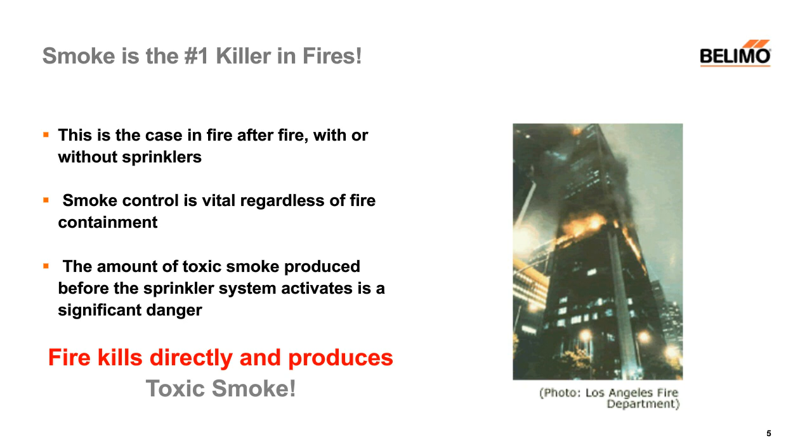Dampers are installed per two chapters primarily in the International Building Code. Chapter 7 deals with structure, and compartmentation needs to be maintained in fire walls, barriers, and partitions, and smoke barriers and partitions. So the whole idea is if a fire starts in a zone, we get dampers closed in the barrier walls so that we can contain both the fire and the smoke.

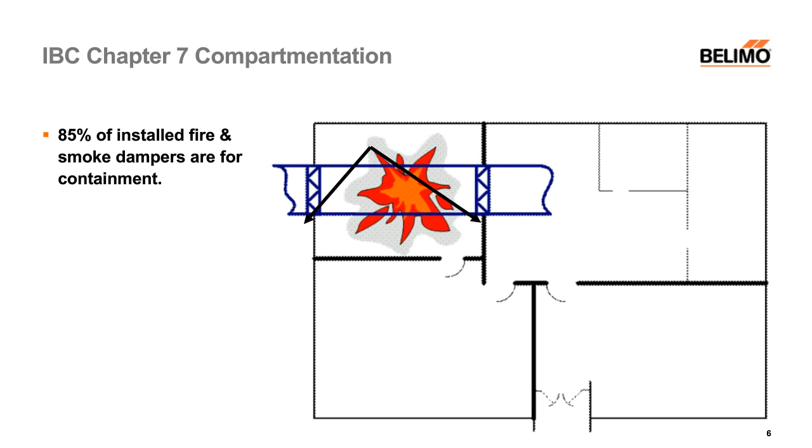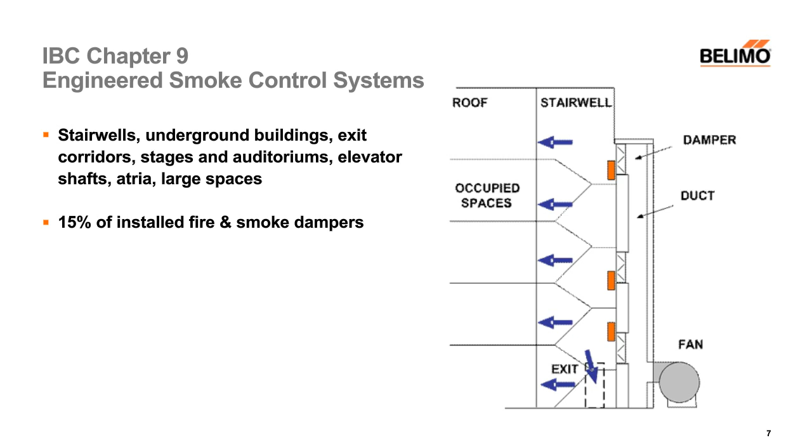About 15% of dampers installed are for an engineered smoke control system. The reason why it's important to distinguish between them is because the testing requirements are different for the two types of systems.

Dampers are installed as part of a system, not just in themselves to protect the walls. Here are some of the aspects of the building which the dampers might be coordinated with. So it can get fairly complicated on the smoke control systems, as opposed to the Chapter 7 applications, which are simple. I'll let you read it rather than my lecturing.

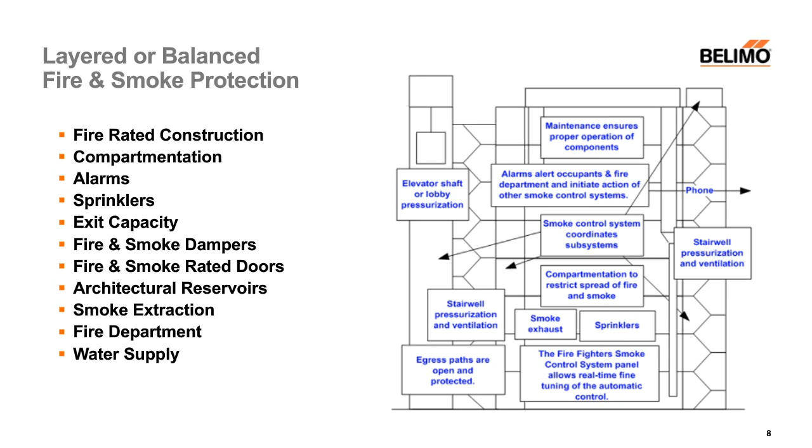So dampers are part of a big system, and we could see things happen in buildings such as bioterrorism, gas or other toxic chemical leaks, and any accidental or intentional fire, of course. We want to control smoke migration far from the origin of the fire. So we've got sensitive property, records, telecommunications equipment, possible water supply shortages, and the dampers are going to be backup or part of a whole system. We speak of it as balanced or layered fire smoke protection.

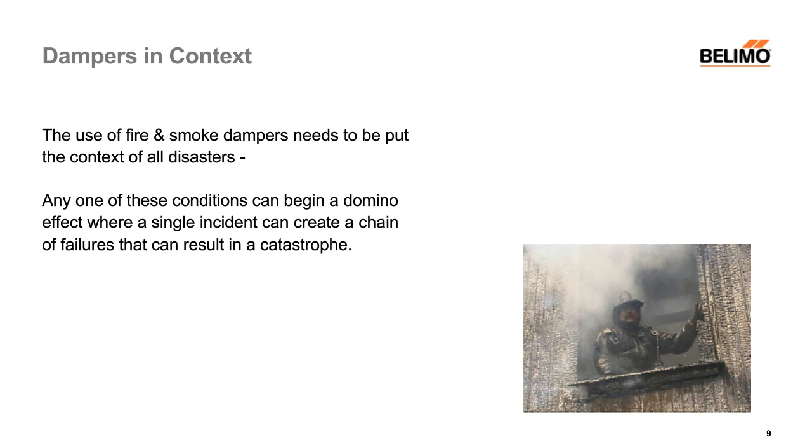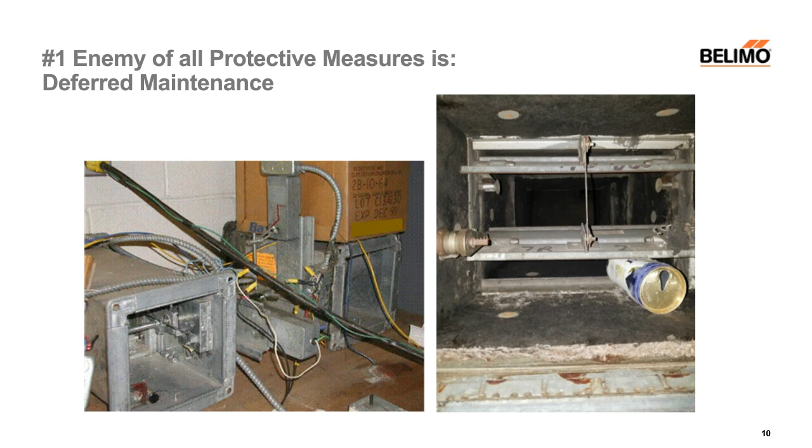The types of dampers: there are ceiling radiation dampers.

So just about every diffuser in any drop ceiling or ducted ceiling is going to have a heat radiation damper above it, and we're going to keep heat from going up into the plenums and causing a problem if a fire is in the space.

They're non-actuated, they're a fusible link, and there is no periodic testing required of these. They're pretty reliable. They're considered perfectly reliable as long as they're installed properly.

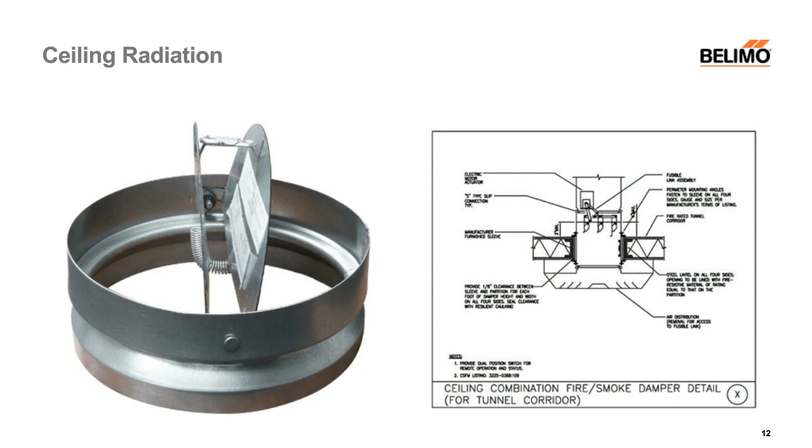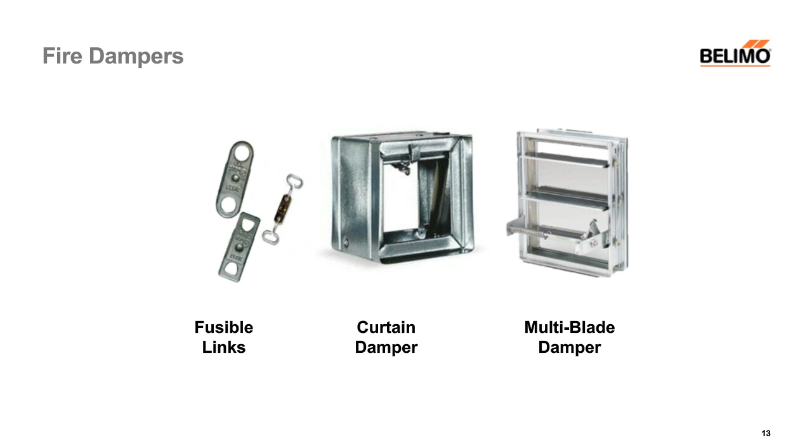Smoke dampers. These are always actuated. We have a mechanical way of measuring temperature, the fusible link, but we have only electronics for measuring smoke. So we're going to have a smoke detector, which might be part of an area smoke detection system or a local smoke detector. And we're going to have a smoke damper that will be actuated, and it will spring that damper closed.

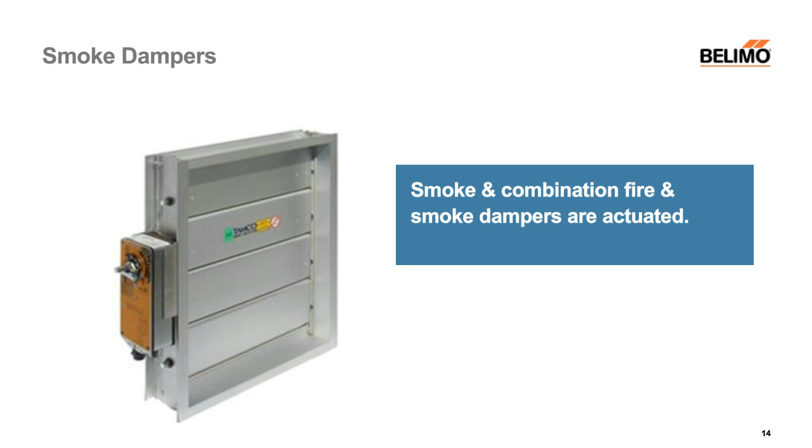And then there's the combination fire and smoke damper. So we're going to have a temperature sensor. At the bottom below the actuator is a thermodisc, which is manual reset. At 165 F, it will cut power to the actuator and spring it closed. And then there will be a smoke detector or a relay wired in series with the power going to that bimetal, and that will be what causes the smoke function to close the damper.

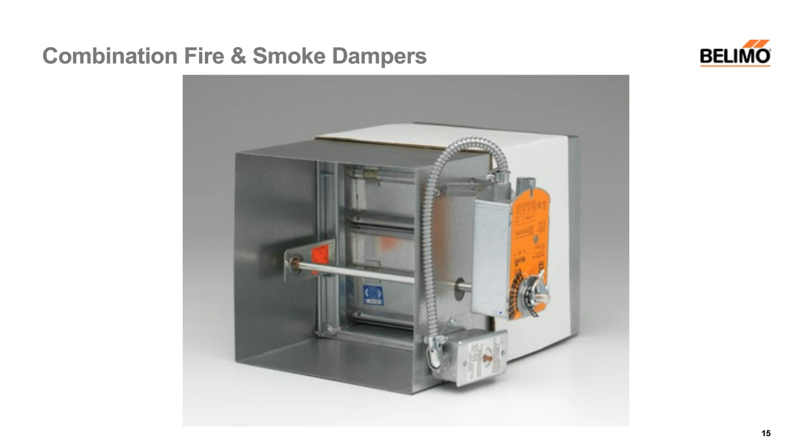If you don't have high temperature, power goes to the actuator, it drives open, and it'll sit open for years at a time until tested.

The damper itself is not connected to the fire alarm system, but codes do call for, if you've got a smoke detector in the building and there's an alarm system, then it's the smoke detector that will close the contact and alarm that there's probably a fire in the building. Smoke will be sensed long before the temperature rise.

Now that's a Chapter 7 application. The Chapter 9 application is going to be a lot more complicated. You could have a reopenable damper. They're not required. You're going to have position indication at the damper, and the firefighter smoke control panel will be able to override the damper, open or closed, or leave it in the automatic mode.

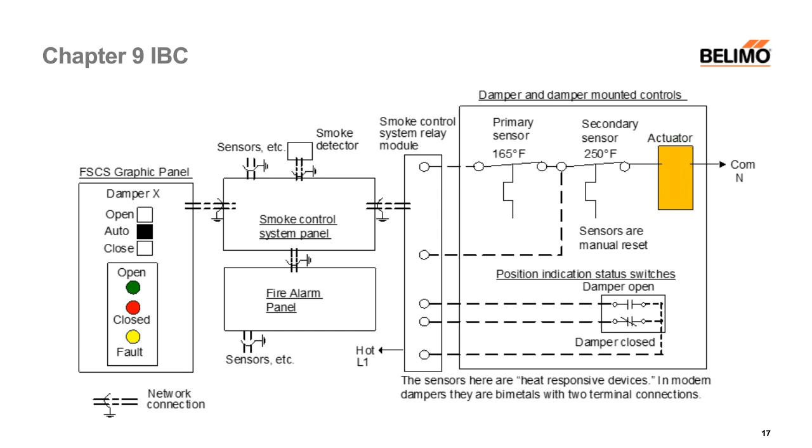New construction, the International Building Code and the International Fire Code are the model codes for everywhere in the United States. And they specify that the fire dampers will be UL 555, smoke dampers 555S, and those ceiling radiation dampers 555C. This is the new construction, and those dampers have to have been tested to these standards.

They're factory standards, so you will test the dampers, and the damper manufacturers will provide installation methods for the different construction, as well as regulating the factory construction and what actuators are allowed.

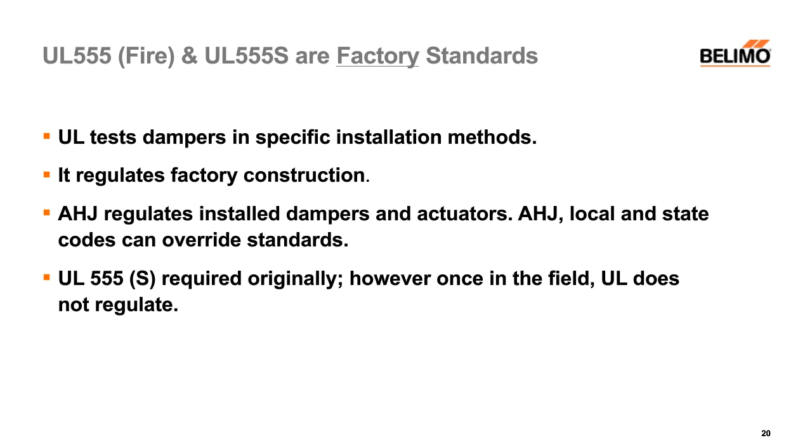Once installed, periodic inspection and repair is mandated by the two codes to use the NFPA standards, standards 80 and 105. Those are the governing standards for periodic inspection and repair. UL 555 is not involved in the field repair once those dampers have been installed.

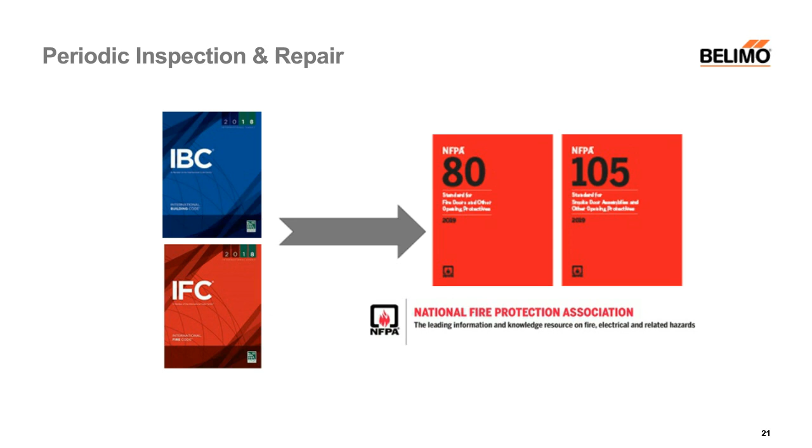So then the periodic testing requirements.

Chapter 7, essentially every 4 years, except in hospitals every 6 years.

Chapter 9 systems are going to have to be tested at commissioning, but then semi-annually if it's a dedicated control system, or if it's non-dedicated—in other words, the equipment is used for some HVAC or exhaust function—then once a year.

And then the Chapter 9 systems for any fire detection and smoke control systems themselves have to go through a weekly self-test. Now, if you read the codes, it would include the dampers—the whole system has to be tested—but there's an exception: if testing the dampers could cause some problem in the building, either mechanical or interfere with operations, then there is an exception that's allowed. I'm not going to go into that part of the codes here.

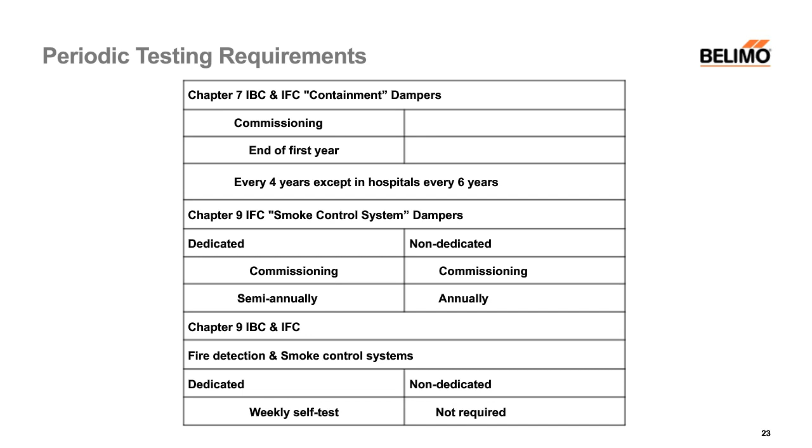So here's the summary. I'll let you read it.

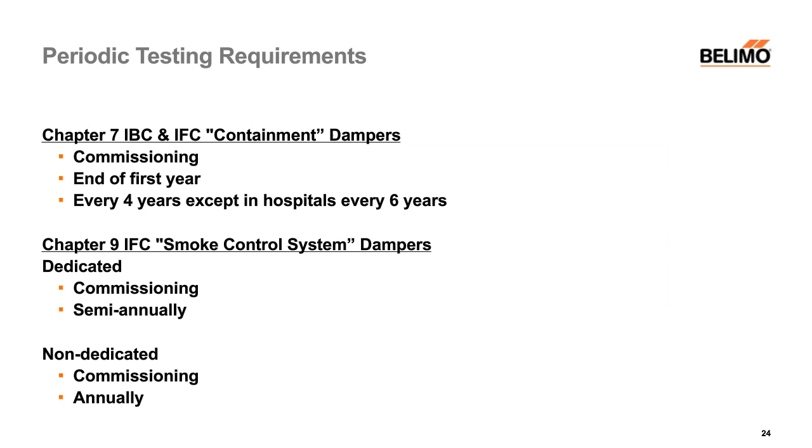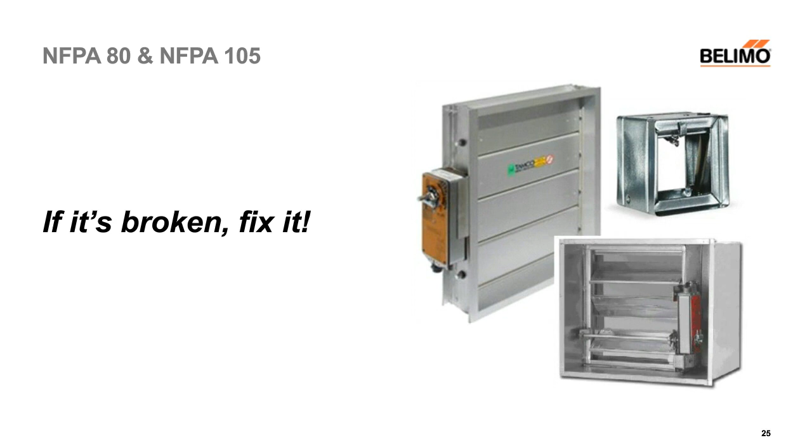So the bottom line is the codes require periodic testing, and both NFPA 80 and 105 are very clear: it's not that you are allowed to repair dampers, you are required to repair dampers. And it's the building owner's responsibility—it's not the fire department, it's not the contractors. Owners are responsible for the periodic testing. Now, of course, they could have their own people doing it; more likely they're going to have a TAB contractor or a dedicated testing service look at all the dampers. And they have to fill out a logbook just saying they've tested each damper.

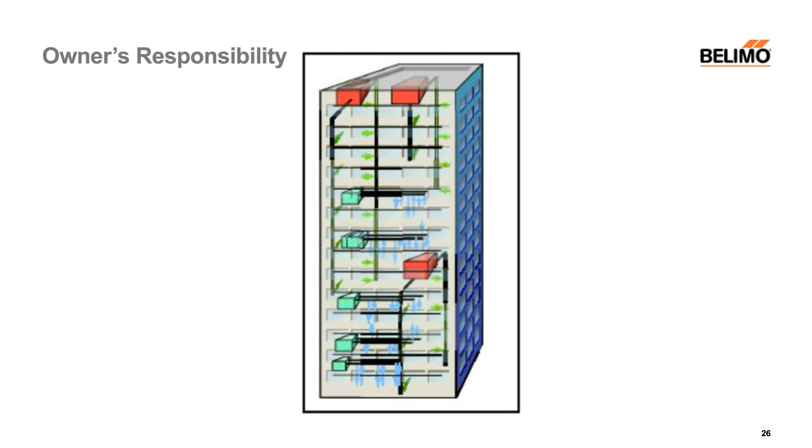Now, AMCA, the Air Movement and Control Association, which is the damper manufacturers group, does have a guide for periodic testing. And the testing is rather straightforward and clear.

Observe that it's open—well, those defective ones we saw in the first pictures were open, but they were being blocked. The damper has to spring or drive to the opposite position. On some of your Chapter 9 dampers, they are normally closed and have to drive open, but 90% of what is out there is driven open and spring closed. So we've got to observe the damper closes and then observe that it opens again to the correct position, and correct any deficiencies. It's very, very clear and simple.

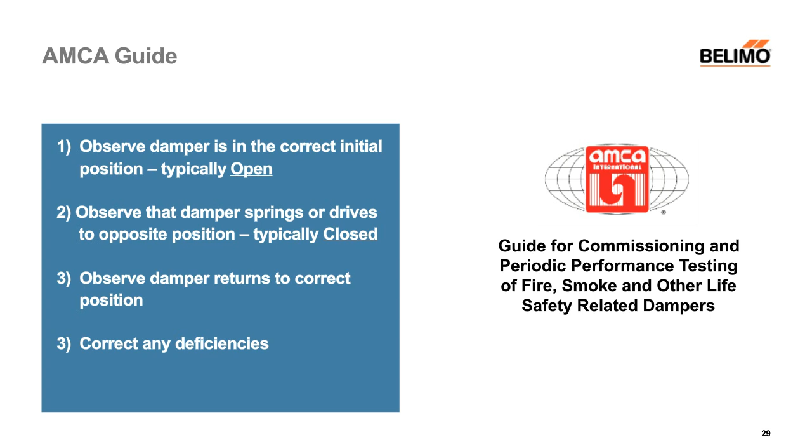Here's what the standards say: you don't have to replace the damper as long as it's in good enough condition to serve, but you've got to fix it right away. And there's the IFC section—the fire code—which is the most important here for repair and maintenance. Section 706.1 states that you should do it in accordance with NFPA 80 and 105.

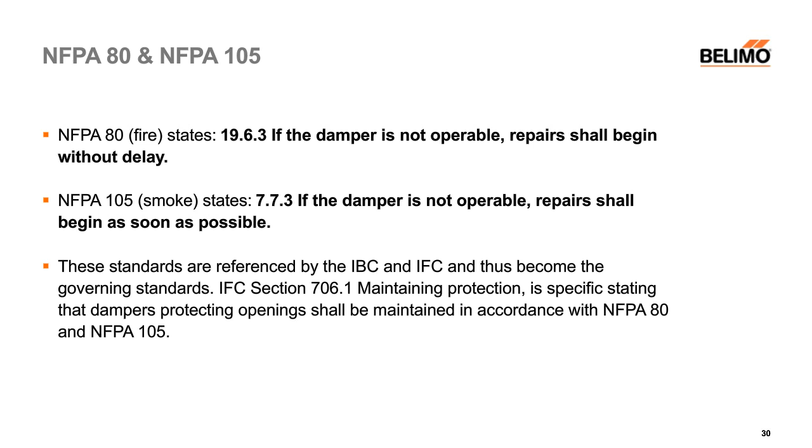So, replacement: damper sizes out there in the market—fully 50% of them are less than 2 square feet, so you're looking at small dampers, small actuators. Some of them are a pain in the neck to get to. About 30% are between 2 and 4 square feet, so fully 80% of dampers out there are 4 square feet or less. And about 10% are 4 to 12 square feet, and about 10% are big dampers. We pay a lot of attention to the big dampers, but the mass numbers of them out there are rather small.

Whenever you're looking at repair or replacement of a damper, you start with the damper, not the actuator. So you don't simply replace an actuator—you've got to look at how the damper worked, particularly the old ones. And I'll show you a couple more examples here.

When people want us to help them, no problem—we do a lot of it every day. Digital pictures are really helpful. About 80% of the dampers are quite straightforward, but about 20% of them are weird and bear some investigation.

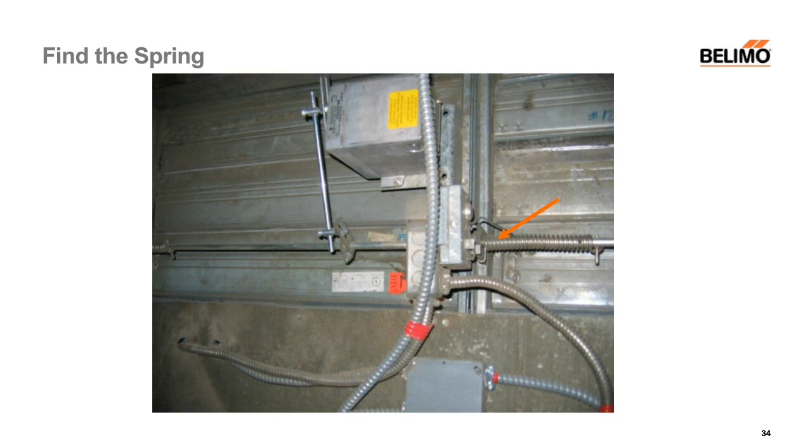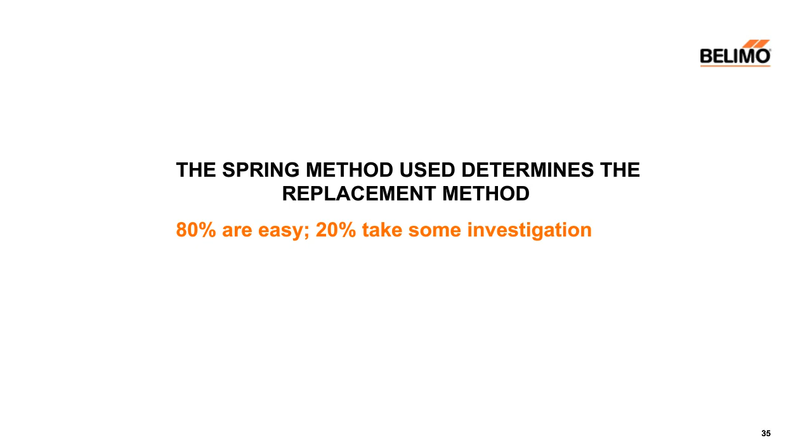So I focus on the spring method whenever I'm working with anyone to do a replacement. And as I said, 80% of them are straightforward, 20% are real old and weird.

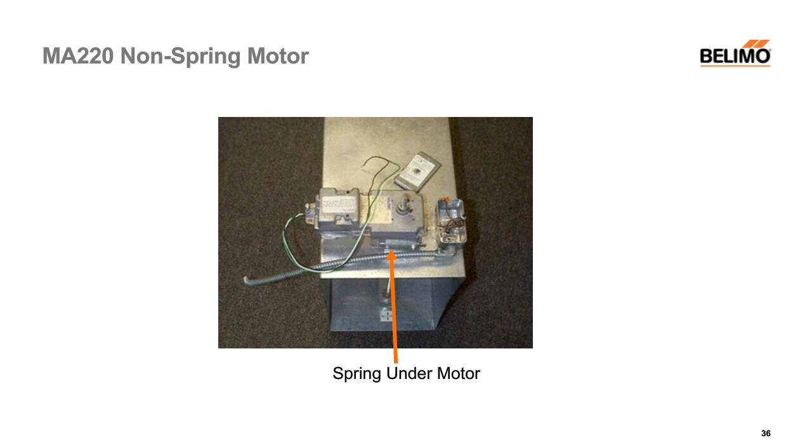Here's a CB MA220. That's a non-spring motor. So when you go to replace that motor, you're going to have to disable that old spring. All it amounts to is 2 bolts and a screw that loosens it, and you get the spring off of there, and then you can mount the new motor. So it ends up looking like this.

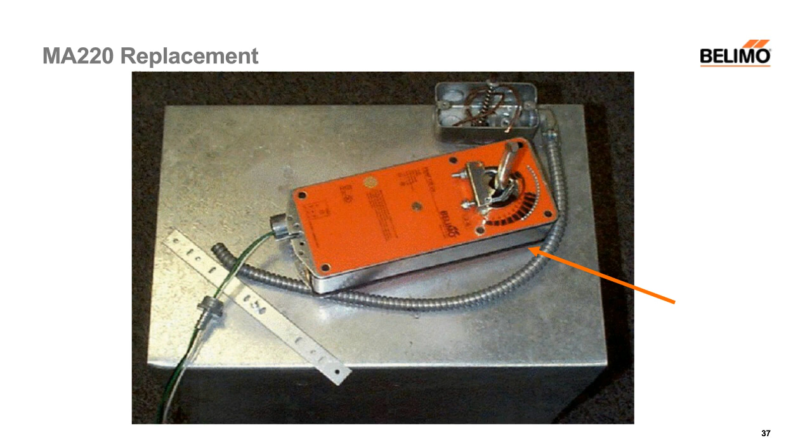So the replacement's straightforward. Here's a common application. You don't worry about the motor itself. You look at the damper shaft, and you can see readily that you can direct couple a Belimo over that damper shaft. So you're looking for the damper shaft, and you want to make sure that all the controls are the same.

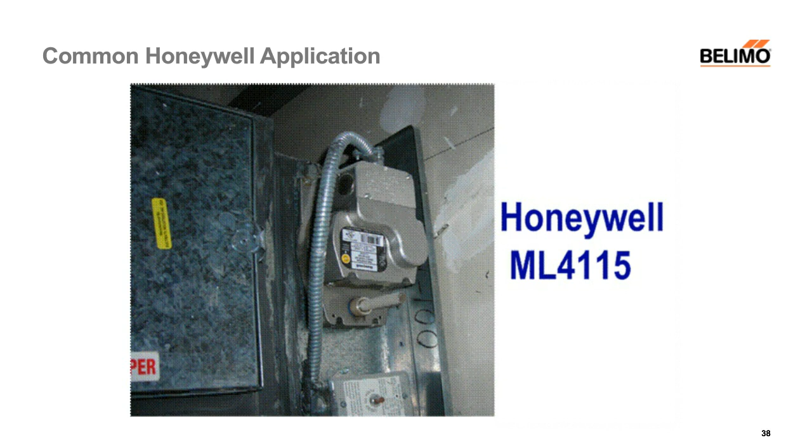Here's one, it's a spring return motor, and the spring is quite obviously visible. So replacement's going to be fairly straightforward. You're going to remove the spring cover and the old motor. It's only a 2-wire application, and you're going to drop a new actuator right over the damper shaft. So you're not replacing only the motor, you're replacing the motor and the spring.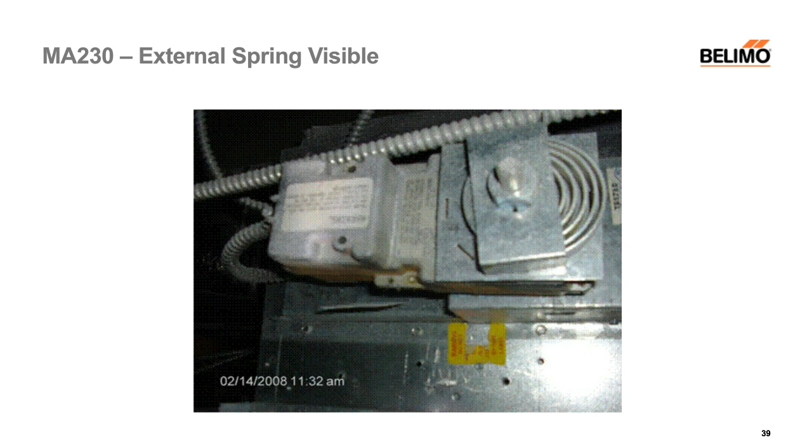Here's a case where you don't try to replace that motor and use a linkage. You're going to direct couple over the damper shaft. So it's the same theme repeated over and over. You just got to take a look at it.

You are going to be careful not to remove the bearings. So there is a bearing underneath that curved linkage. You're not going to remove that.

Notice the spring on the damper shaft, top right of the picture. There's a fusible link there that's holding that arm back, and if it melts, that jack shaft spring will slam those blades closed. So that's the fire function. The smoke closing function is the motor. So you're going to leave that fire fusible link and spring alone. Those don't get changed.

So this dual springs is very common on older dampers. On the left side there's a fusible link and a spring. You don't touch it. On the right side, you've got an old motor, but we're not going to try to replace just the motor. The spring is on the motor shaft, and there's an arrow pointing to it. You're going to go for the damper shaft, which is on the right side. So you're just going to remove all the old linkage and motor and direct couple to that damper shaft.

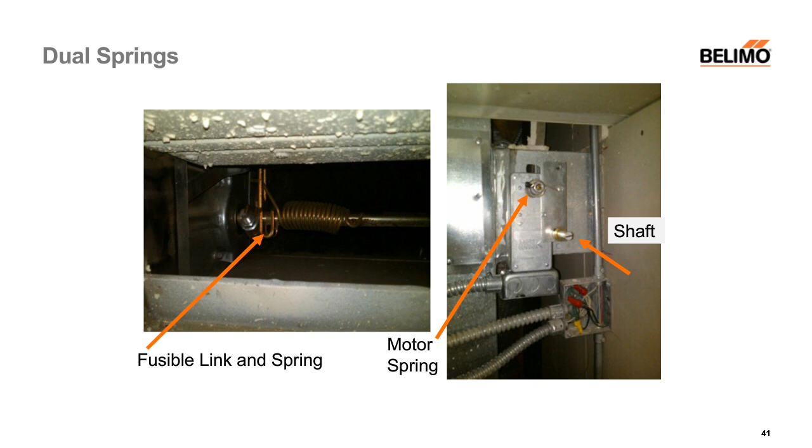So on the left side there, you've got a motor. You can't see it. It's hidden underneath that sheet metal piece. You've got a spring, a housing, linkage. You just get rid of all of it. And when you go to the right picture, you're going to see that we've direct coupled right over the damper shaft. That's the way the modern dampers are handled.

In this case, we had a very short shaft, so we put the clamp internally. You can see the old motor, its shaft is sticking out above the Belimo. That old motor made a nice platform for mounting the anti-rotation strap, so we didn't bother to remove the motor. We probably should have hacksawed the shaft off to make it look better, but that's not a functional part.

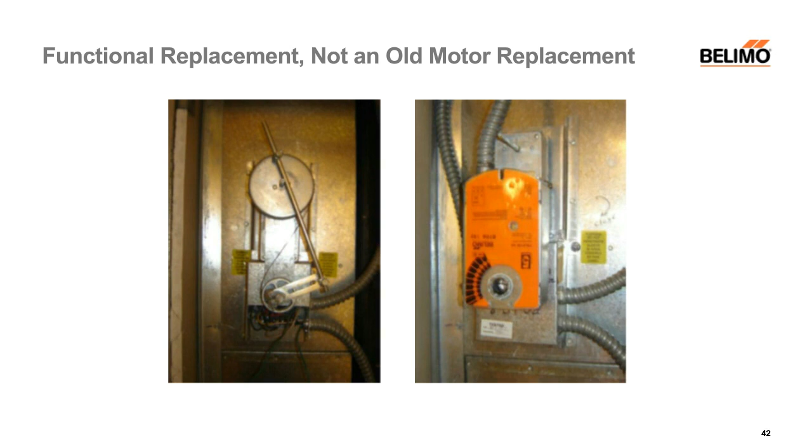So the single spring was another method used. It's different. You're going to have to replace the fusible link on the damper and disengage that old spring. And then when you put a spring return motor in, you're going to have to put in a new temperature sensor. So there's a manufacturer's part number there. You can use ours or the manufacturer's, but you got to put in a new thermodisc.

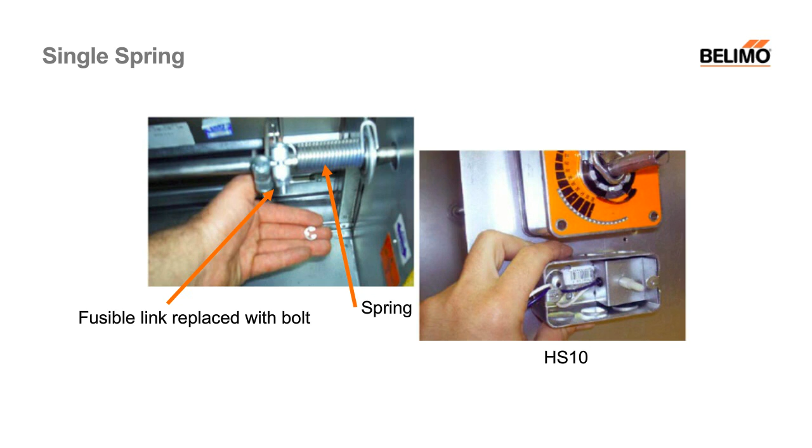Here was an old Phillips motor. That's that first picture I showed. The motor's non-spring. So that arrow over on the right picture shows where the spring is on the old damper. So that motor has to be replaced with a spring return motor, same linkage parts, and then you've got to disable that spring that's on the damper.

When I first looked at this one, it was in pretty bad shape, and I said, why don't we replace the damper? And the fire marshal had already approved it, and everything worked fine. But when you look at some of these old ones, you wonder.

Negator spring dampers were quite different. That spring shown there is connected to the damper blade itself, and it pulls that damper closed. There's a fusible rod instead of a fusible link that connects between the crank arm on the jackshaft and the damper blade.

These parts are no longer available. The dampers were very solid and quite functional, it's just that you've got to replace all the parts with modern parts, and we have a full instruction showing just how to do it. The pneumatics are much easier, and the damper manufacturer does have a kit for mounting an actuator externally.

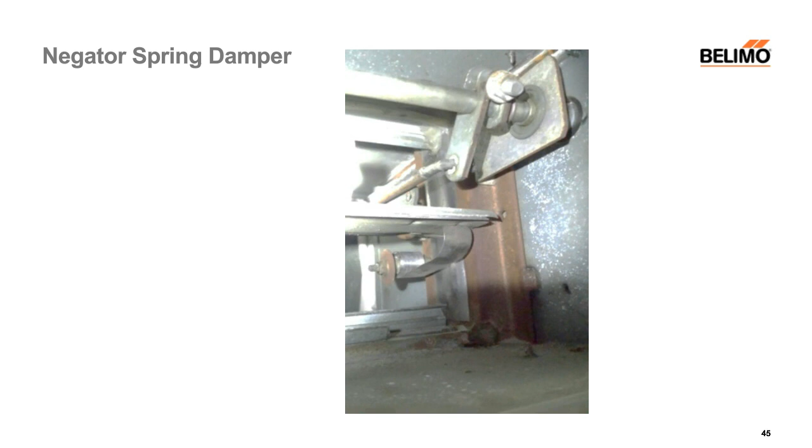Typical retrofit instructions - we have instructions on our website at www.belimo.us/firesmoke, and it goes by the damper manufacturer with different actuators. We've got instructions for all of those that we've bumped into over the last 20 years, so you can get a specific instruction.

The instructions themselves have the UL statement, the code and standard issues, what NFPA 80 and 105 say, and then it goes through the technical requirements, the cross-reference for the motors, and the last page is always a form that you can fill out for testing, and then leave it in the building per NFPA 80 and 105 so that you can meet the code requirement that a logbook or record is kept.

Both NFPA 80 and NFPA 105 require the logbook or record be kept. Some cities have overridden it, just simply saying you've got to keep a copy of the invoice. Chicago, for instance, that's the rule - keep a copy of the invoice in the building for any changes you've made.

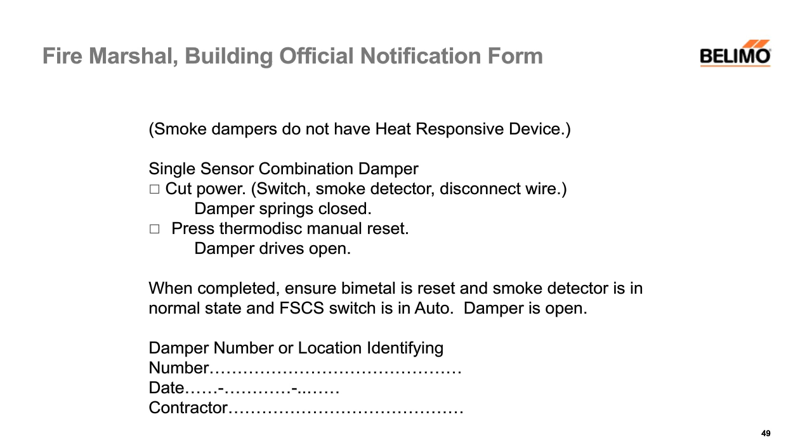I've got three other classes that I run commonly, so if anyone wants me to set up a webinar, our people can do that. I have one that goes through details of a lot of those dampers and the replacements, another that covers only the standards and codes, and another that's our product overview.

Product is the easiest part of all of this, and torque is the least of the things that we have to worry about. We know what the UL 555 requirements are. It's typically mounting and whether you need to put in a new sensor or not. So the replacement is a rather straightforward issue once you know what you're looking at.